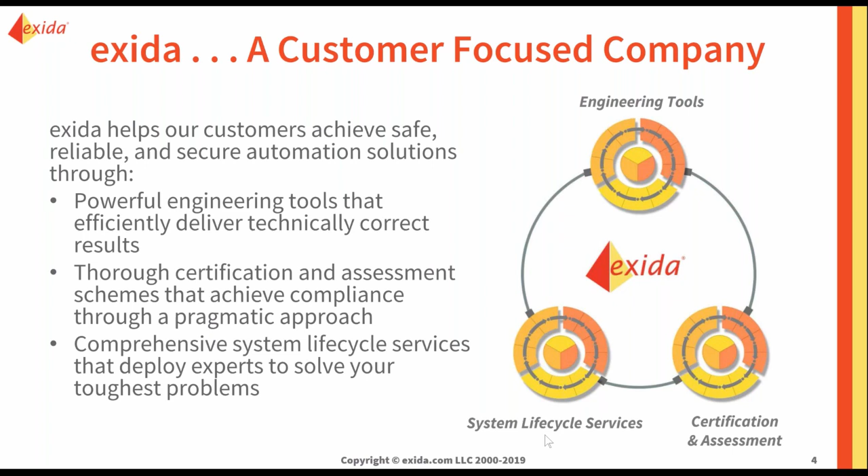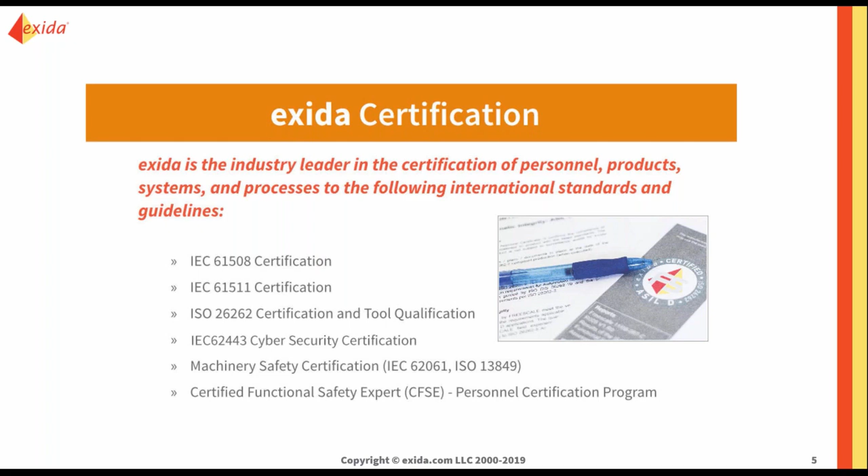Today, we're primarily going to be talking about the exida certification group, and the exida certification group does primarily functional safety and cybersecurity certification for personnel, for products, for systems, and even for engineering processes.

We started that particular business segment in about 2004, and we didn't realize it, but by 2014, we had become the global leader in functional safety certifications. We didn't realize it until ARC Advisory Group did a market study and showed we had about two-thirds of the entire functional safety certification market.

And even in the logic solver category, where the very first certifications were done in 1982 by TUV Product Service, which is now called TÜV SÜD, even in that category, exida has overcome a 20-year head start to become the market leader.

As you can see in the slide in the lower left-hand side, exida is the strong market leader, but we have strong competition from TÜV Rheinland, who's right behind us, and the other active companies doing functional safety certification are TÜV SÜD and TÜV Nord.

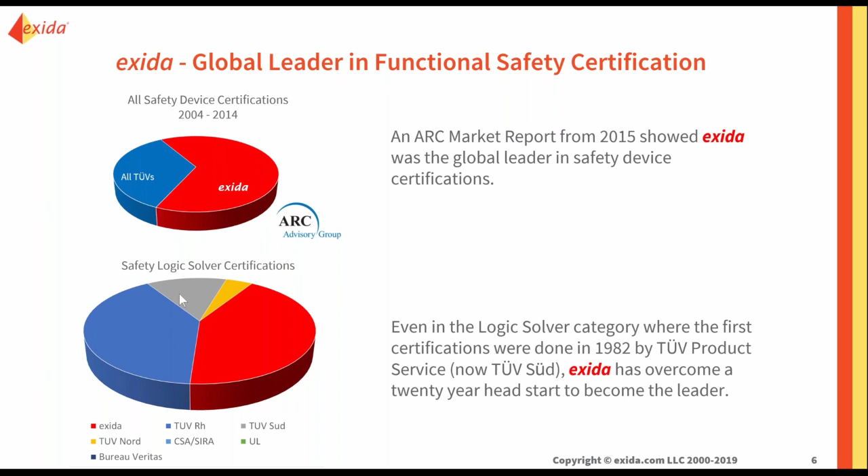exida pioneered automation cybersecurity and remains the clear world's leader in automation cybersecurity certification. We're very proud of our impact in these new areas.

Now, what is the SIL business all about? What is a SIL? In many industries and applications, automatic protection systems are designed to recognize dangerous conditions and take action to mitigate the danger.

This has been going on for decades and decades. Of course, when it came time to use complex electronics and software for this purpose, there was a lot of controversy. A large group of people met for many years and created a standard on exactly how the engineering should work for such important systems. And the engineering to create these systems is now done per a specialty field called functional safety. The basic safety standard defining this field is IEC 61508.

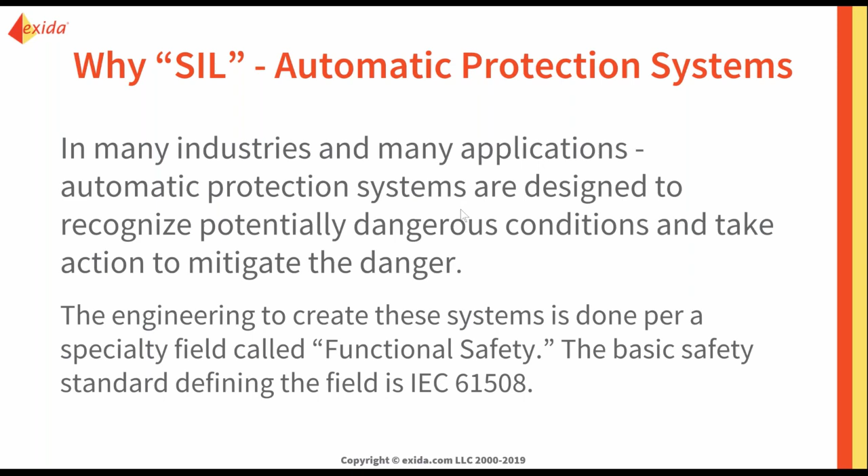Now, what is the SIL business? The 61508 standard has a definition for safety integrity level, and that standard defines four levels called SIL. You can see 1 is at the bottom. It's the least safe, and it has a risk characterized by a risk reduction factor between 10 and 100.

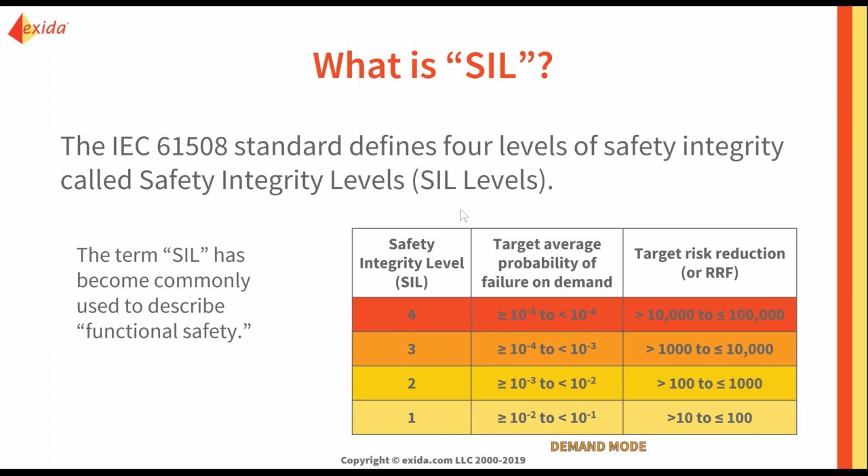Well, if we have this thing called SIL, and we know what it is and we know what the standard is, well, what is this thing called SIL certification? It's third-party expert attestation. I spotted that word in the standard for product certification programs. Thought it was kind of fancy, and I kind of like that word, attestation. Anyway, it means you get a really good expert to audit and attest that the subject of the certification meets the requirements of the standard.

What do they look at? Well, we do a detailed analysis of the engineering and test processes. Objective, determine the design quality and cybersecurity resilience.

We do a detailed analysis of the hardware design and the design margins, and that results in, if you have a good tool and a good method, a prediction of random failure rate in all failure modes. We do a detailed analysis of the software design, automatic diagnostics, and any response mechanisms designed into the product. And lastly, there's a detailed analysis and testing to show safe, correct operation of the product and to show sufficient cybersecurity susceptibility.

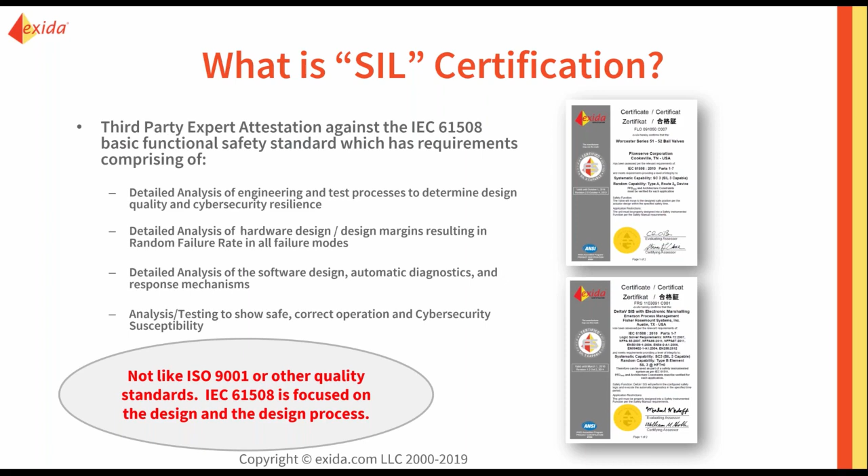As you might guess, or as you might see right away, this is not like your ISO 9001 quality standards, which originally concentrated on manufacturing procedures and manufacturing process quality. IEC 61508, on the other hand, is not focused much at all on manufacturing. It is focused on the design process, and therefore the quality of a design.

Who does SIL certification? Certification programs have been established by private companies and some governmental bodies around the world. But what's important is that any organization doing certification work should be accredited for their field of work.

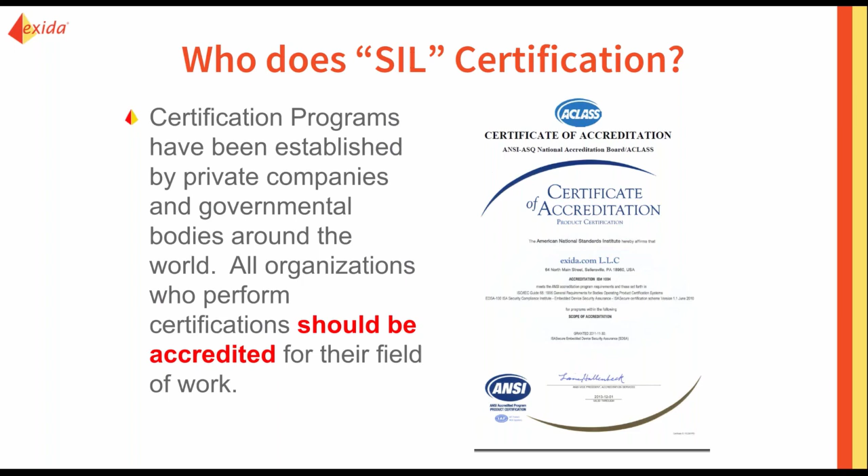In the United States, for example, exida was accredited by the American National Standards Institute, ANSI. ANSI is a member of the International Accreditation Forum, which means all the different accreditation bodies in the world compare notes and set up common criteria, and they have a multilateral recognition agreement which assures the global acceptance of any certificate that's part of this program. So this is a nice infrastructure that has been set up to accredit and validate certification bodies like exida.

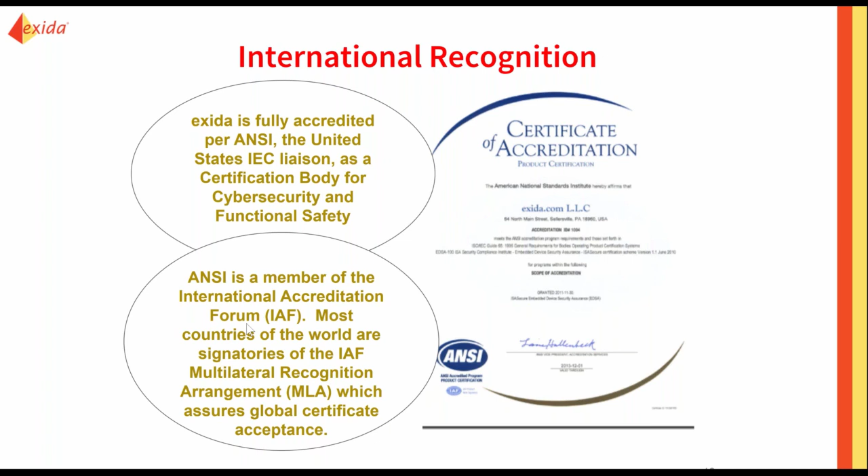Okay, we have this nice infrastructure. We're working to accredit per 61508, but what is 61508? IEC 61508 has two primary goals, and I hope these are pure common sense. Many of the requirements in the standard are directly aimed at making sure the product works correctly. We want it to be reliable. We want it to work and not fail.

Well, that's a good thing, but there's one more dimension to it, which is very important. We want to make sure the system will fail in a predictable, safe manner, which means the designers must consider the impact of failures and design for fail-safe response. Every requirement in IEC 61508 is intended to achieve these simple goals.

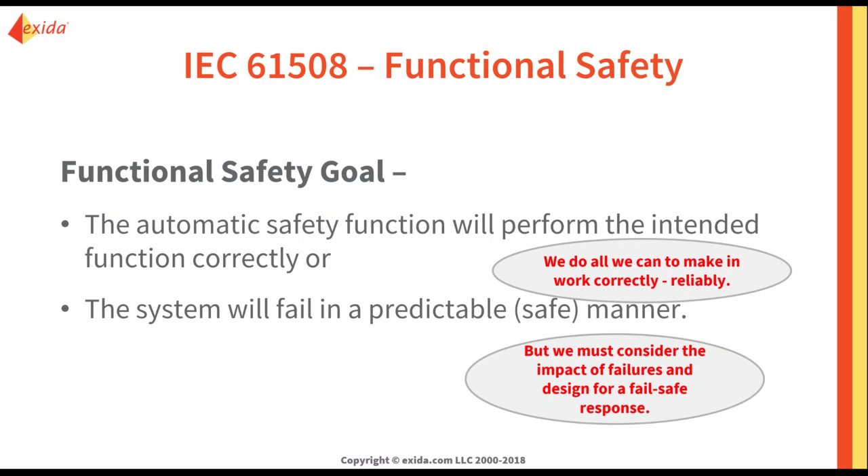Now, system designers have to look at three things when they're selecting the equipment they use, like your PLC, or your gas analyzer, or your motor controller. They have to look at a thing called systematic capability rating. They look at a thing called architecture constraints, and they look at a probability of dangerous failure calculation.

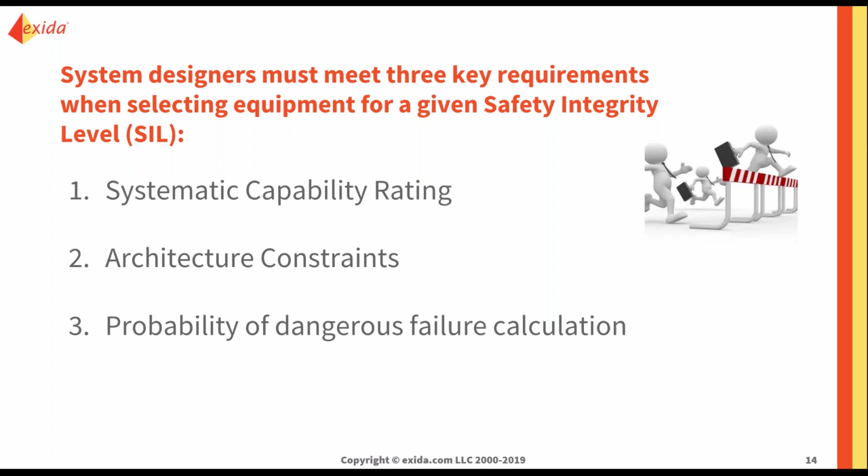What are these things? Well, systematic capability is a measure of design quality, justified by a PLC customer based on prior use experience and documented field history, field operation history, or alternatively IEC 61508 compliance.

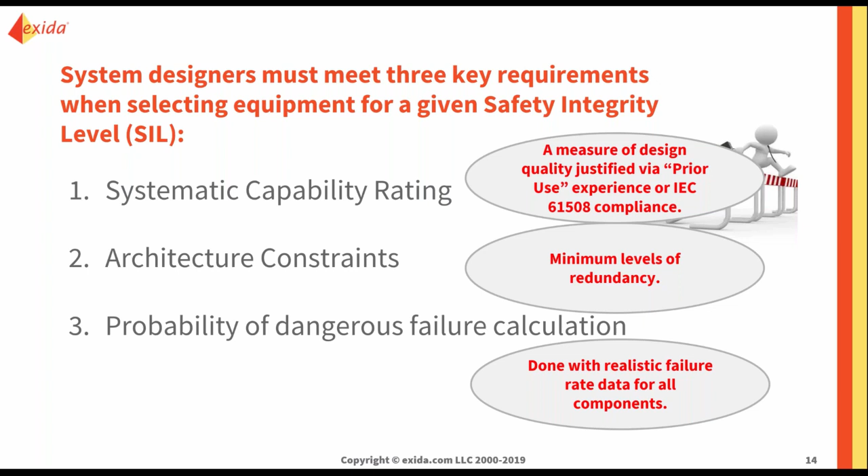Architecture constraints is just kind of a fancy word for sometimes there are minimum levels of redundancy. You're required to have a certain amount of redundancy in some designs. And lastly, this probability of dangerous failure calculation is interesting, but the key is it must be done with realistic failure rate data for all the components in a system design.

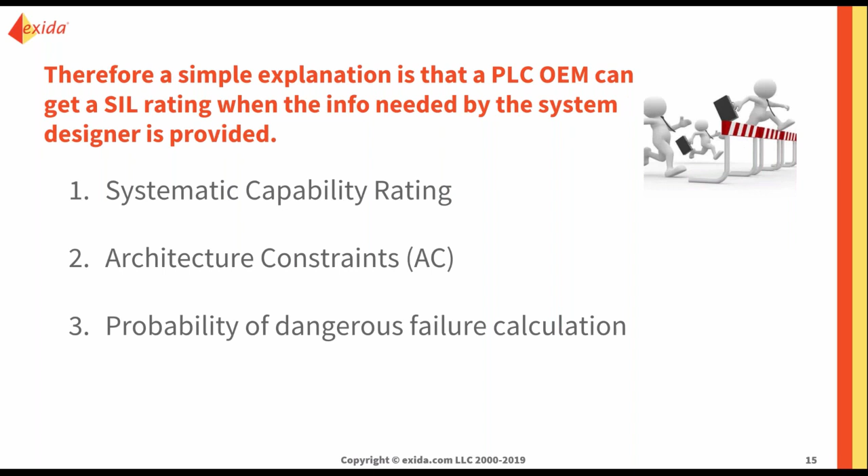Now, what does that mean then to an original equipment manufacturer trying to get a SIL rating? It means you must achieve a systematic capability rating done by detailed analysis of the engineering and test processes, which are done to determine design quality and cybersecurity strength.

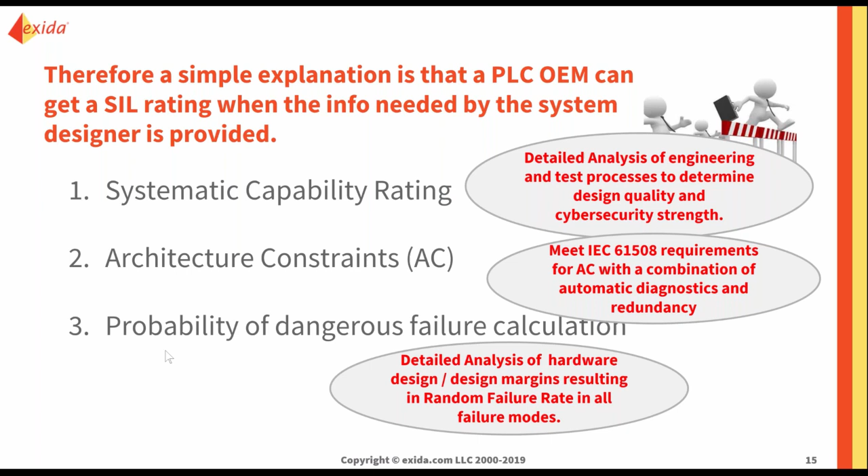It means you must meet certain requirements from 61508 for architecture constraints using a combination of automatic diagnostics and redundancy. And lastly, it means that the OEM must do a detailed analysis of the hardware, resulting in a failure rate prediction for all failure modes. You have to provide numbers that system designers can use when they're designing their system.

All right, what is this systematic capability? What do you have to do? Well, remember, we're trying to measure design quality. You have to have engineering process requirements that are based on good quality systems and good software engineering techniques. Those processes must be defined, documented, and audited. And the level of detail and the rigor increases with each SIL level. The process requirements for SIL 1 are not as strong as the process requirements for SIL 2, and so forth in SIL 3 and SIL 4.

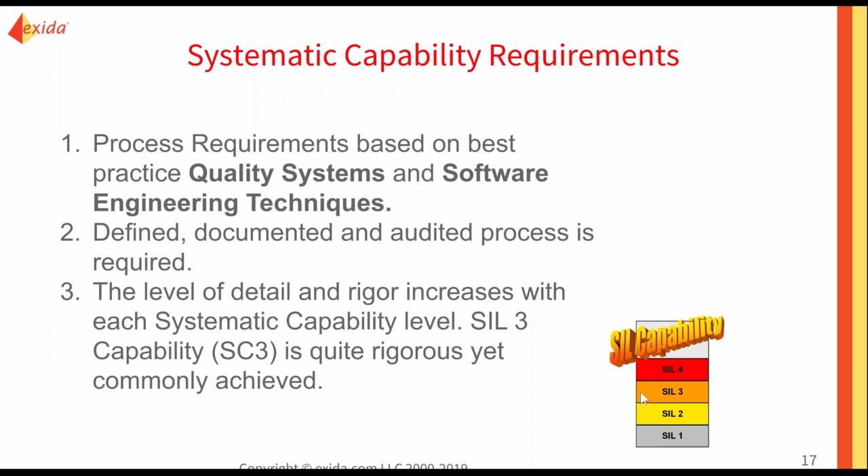Every process has to have a defined set of steps. For each step: what input documents and input information is required, what output documents are generated as a result of that work, what work is done in each step, and what error checking techniques are used to make sure the work in each step is done properly. And if you think about it, that makes sense. We're trying to make sure the product works correctly, and we don't want any residual design flaws.

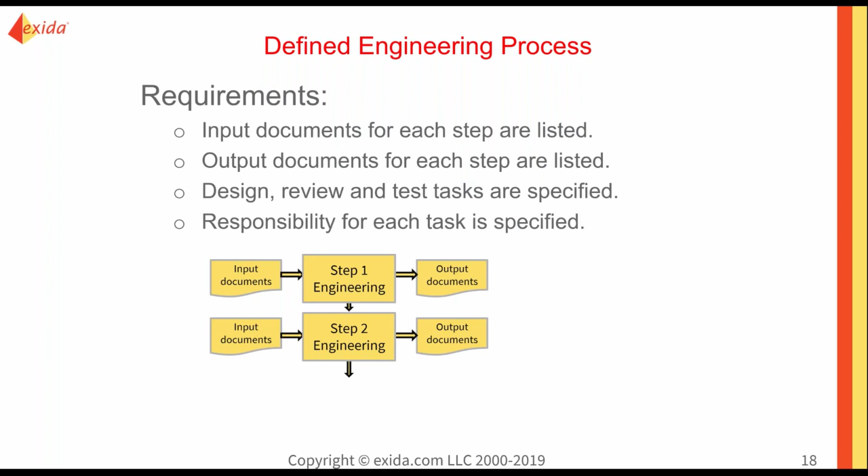A big part of the process is software engineering. Now, for those of you who have not heard about it, I remember reading about software engineering in the mid-1980s. It was a series of engineering techniques designed to increase software design quality and reduce design mistakes. Well, that sounds like 61508, which increases the probability that the automatic safety function will perform correctly. So software engineering is all about correct operation.

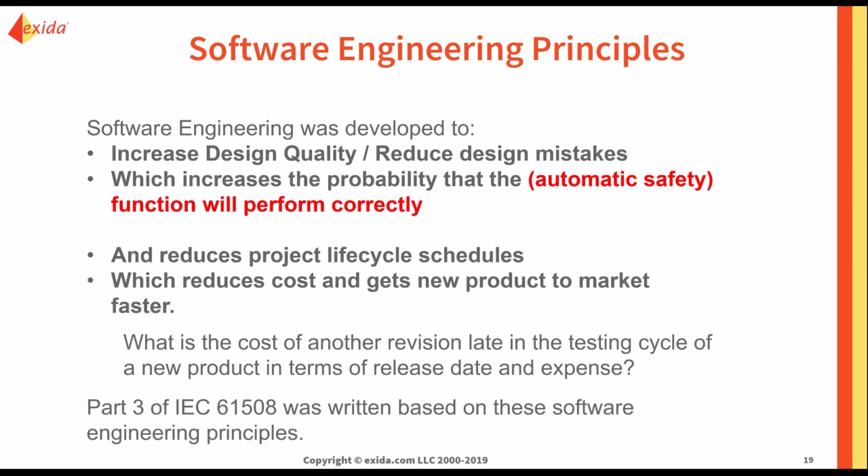Now, of course, software engineering should also reduce project lifecycle schedules because it reduces rework, and it should reduce product development cost and get new products to market faster. I remember reading a lot of studies about this in the 1980s, and it was quite interesting. The bottom line for this webinar is that Part 3 of IEC 61508 was written full of requirements based on fundamental software engineering principles.

But you got to have a good process. In other words, I like to say you got to have some playground rules. Now, I don't mean to insult software developers. I think of embedded software development work that I used to do, and I loved going to work. So I can almost think of my work as a playground.

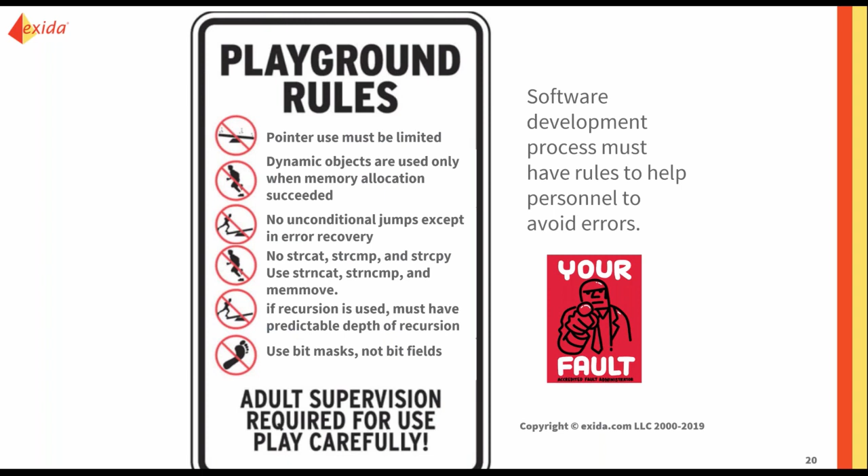Yeah, believe it or not. But you got to have rules in any playground. And the software development process must describe those rules and have enforcement mechanisms in place. Yeah, adult supervision is required.

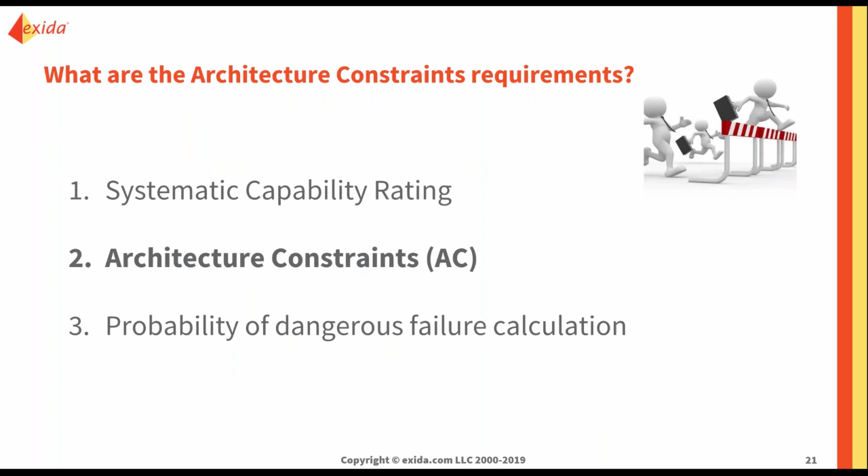Systematic capability, good engineering process, hardware and software. What about architecture constraints? That's where we have to meet 61508 requirements with a combination of automatic diagnostics and redundancy.

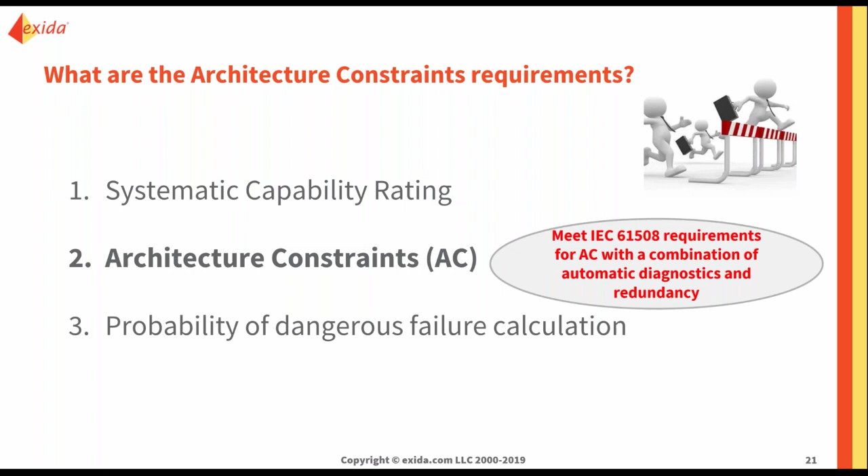I'll just briefly describe what this is all about. The 2010 version of 61508 had two alternative mechanisms to meet architecture constraints: Route 1H, which uses the upper chart, and Route 2H, which uses a set of rules characterized by the lower chart.

And you can see the lower chart's a bit simpler, and Route 2H can be used if you have a good traceable field failure rate based mechanism for your failure rate predictions. And if you don't, then you have to use 1H, which is still calculated from the failure rate predictions. But the bottom line is Route 1H doesn't have as much

depth and precision required on the failure rate prediction mechanism. But both of these methods, 1H and 2H, depend very much on failure rate predictions. And the bottom line is redundant hardware may be required for the higher SIL levels.

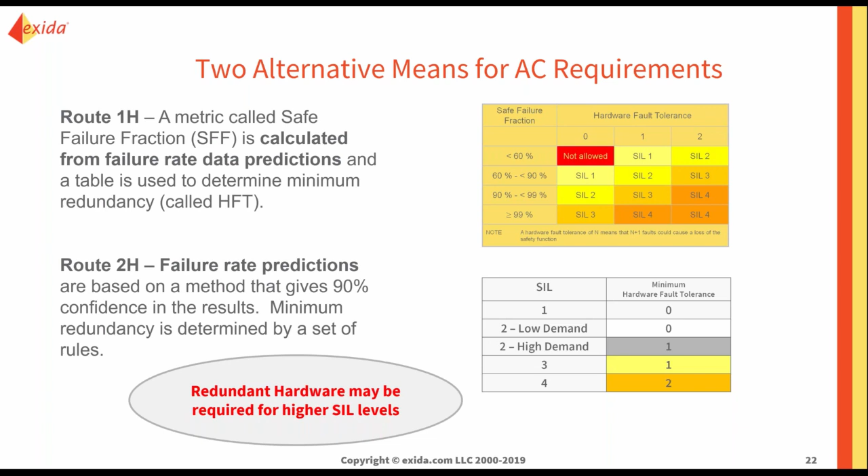Systematic capability is your engineering process. Architecture constraints is automatic diagnostics in combination with redundancy.

The last thing is we want to talk again about the importance of this failure rate prediction, because what we're trying to do is do a detailed analysis of the hardware and the design margins, resulting in a random failure rate prediction for every valid failure mode of a product.

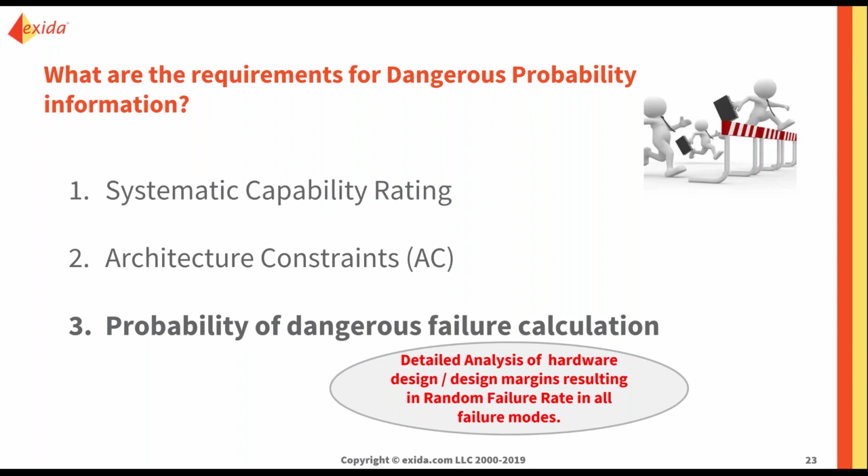Now at exida, we use the FMEDA methodology to accomplish this. And FMEDA stands for Failure Mode Effect and Diagnostic Analysis. It's a method that was created in the late 1980s by engineers that are now at exida. And it is a study of design strength. Better, stronger designs have lower failure rates.

Also, you must consider the components and their application parameters. The FMEDA technique requires a component failure rate database with failure rates and failure mode distributions for all of the components, typically done as a function of application and environmental profile. So the component database has a lot of data in it.

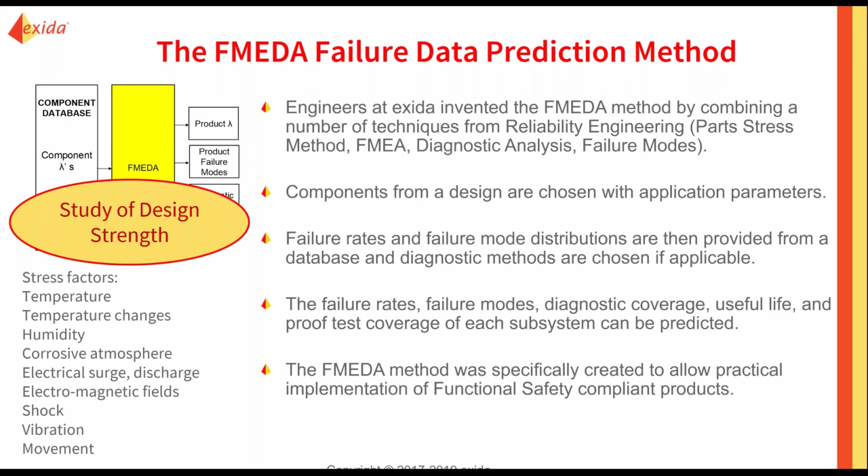If you have a good component database, you can use the FMEDA technique to predict failure rates, failure modes, diagnostic coverage, which is a measure of diagnostic quality, useful life, and even proof test effectiveness for each subsystem. The whole FMEDA method was specifically created to allow practical implementation of functional safety compliant products.

At exida, we have a specific tool developed for doing FMEDAs called FMEDAx. It has all the features we need to pretty cost effectively meet all the functional safety standards. And we do make that tool available to our own analysts and our competitors. And some of our competitors are using the exida tool.

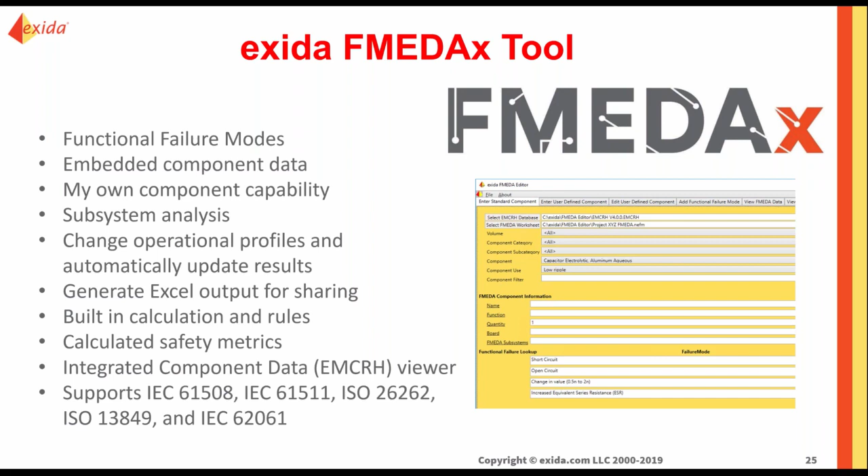But the tool's got to have that good failure database that I talked about. Early on, there was a lot of debate about what to use. And what's important is you use a database that produces realistic predictions for the particular application.

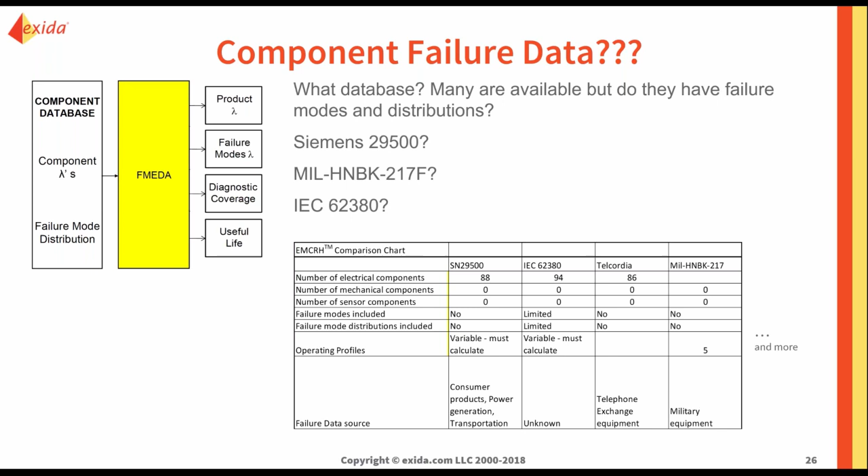To make sure that happens, at exida, we use what I call a closed loop technique, where we gather up field failure data from manufacturer's data, from exida's SILStat failure rate collection software, ISPM, another failure rate data collection software, OREDA, the Offshore Reliability Equipment Database Association, and we compare the OREDA published data with field failure data from other sources, and we compare the total failure rate for a product to the FMEDA result.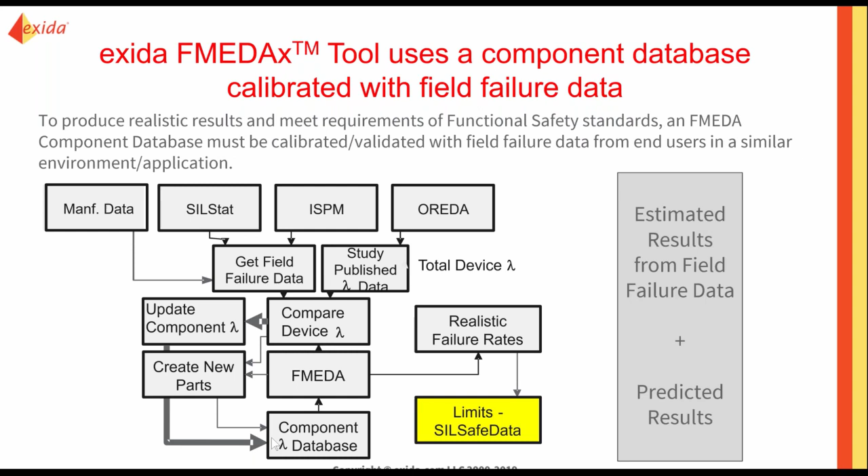It works pretty good. Of course, it's a lot of work and it takes a lot of time, but it's the only way we could think of to do it.

The FMEDA-X tool does have electronic components, mechanical components, and sensor components, with many new technology components using the latest semiconductor technology. We're able to work pretty closely with several semiconductor companies to keep our database way up to date. And at this point, this database has been validated with over 350 billion unit operating hours of equipment data from multiple applications and multiple environments, which is pretty nice.

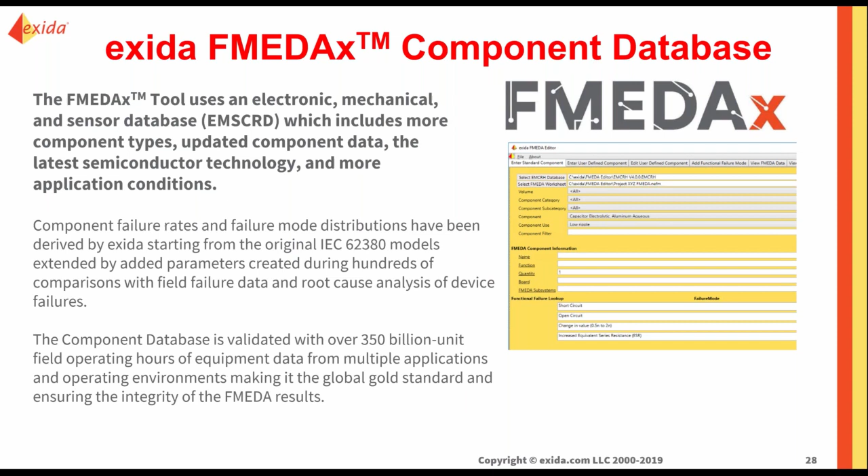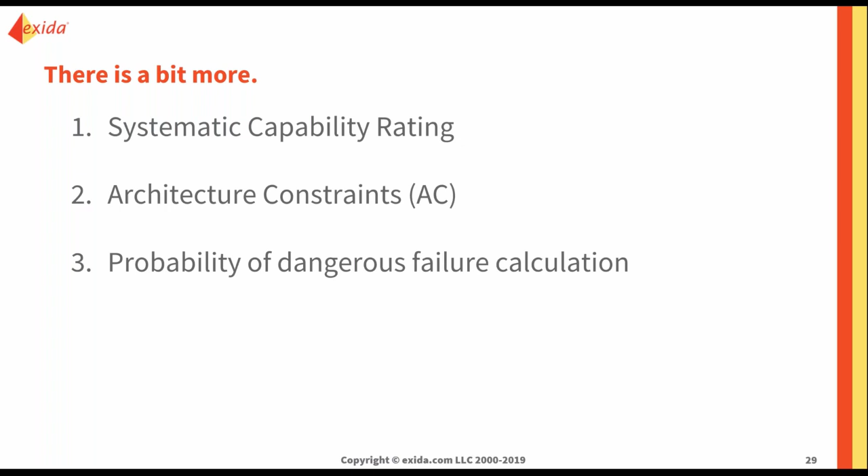Now, we talked about systematic capability, architecture constraints, and probability of dangerous failure calculation. And those three categories tell you a whole lot about 61508. We do detailed analysis of engineering and test processes. We do a detailed analysis of hardware in order to determine failure rates, which are used to meet architecture constraints. And then, of course, we provide the failure rate data for system designers to do probability of dangerous failure calculation.

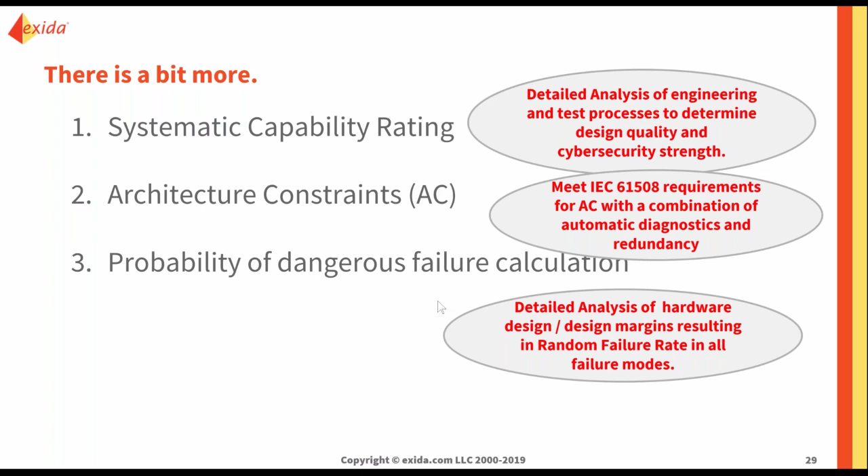And I kind of misled you because there is a little bit more to it. There is a need for an audit of quality procedures. There needs to be manufacturing audit, unless that's done by someone else, another company, which may be the case. And of course, the objective there is to make sure that a given design can be replicated safely. And lastly, there's a product documentation audit.

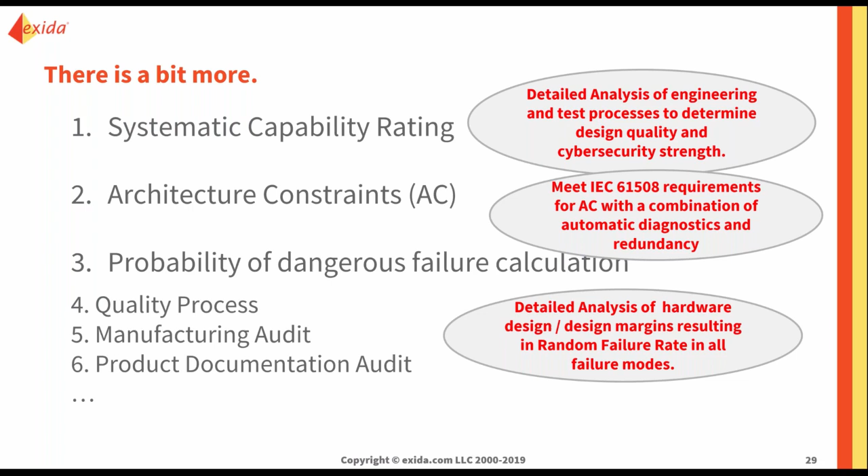Exida uses a concept called the safety case, where we have documents listing every single requirement from 61508 and any other referenced standards.

So we go through for every single requirement and make a judgment as to whether the company and the product meet each requirement. You write down an argument as to how you meet that requirement, and for every argument you must have evidence showing that the argument is valid. Requirement, argument, evidence.

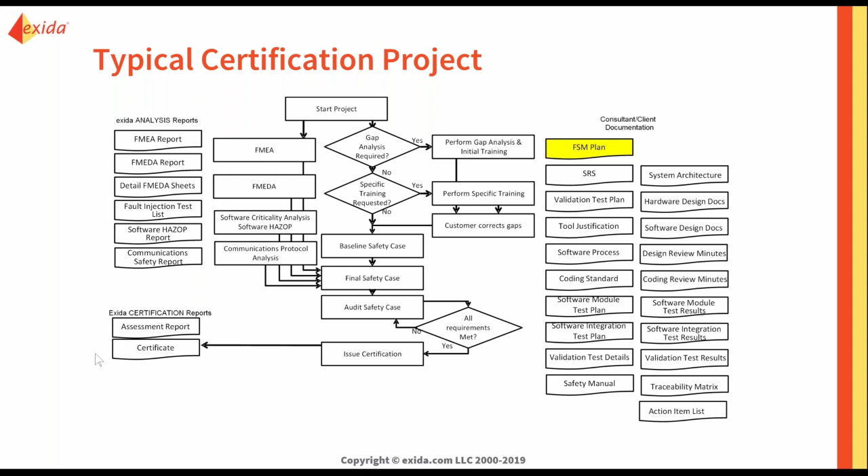Now, you saw this certification project, and you saw that it might have looked tough. It's okay. I want you to know that many have been successful. Hundreds of automation manufacturers have successfully achieved IEC 61508 certification using the exida process, which we think is tougher than anyone else - well, we know it's tougher than everyone else. And yet, people still pass. Here's two examples that have achieved a SIL 3 systematic capability, which means they have a pretty good process in place. Nothing's perfect, but it's really good. So it can be done. You can do it.

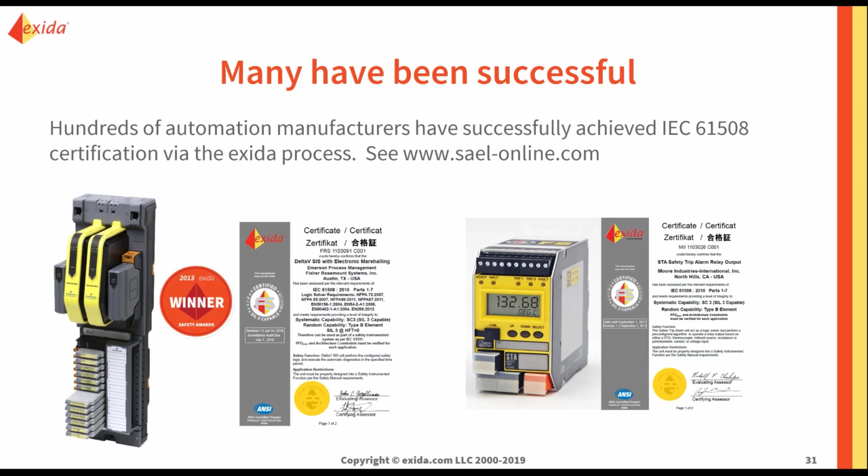Let me be positive with you. You might ask yourself, why are you really interested, and is it worth the trouble? Well, we have to ask the question, why does anyone even care about SIL? In the process industries, the 61508 derivative standard, IEC 61511, specifies 61508 certification as one of the ways to justify equipment selection.

And it's really simple and really easy. Therefore, what we see happening is anyone who is interested in saving engineering hours and getting their equipment justified rapidly will be using 61508 certified devices. Another way of saying it is that many of the designers want to dump the problem on the vendor. And of course, that's been going on for decades as well.

Many operating companies want to reduce spare parts types, and they use certified components for everything in the control system - the automatic protection and the control. Many petrochemical companies are now using 61508 certification as a measure of product design quality, which I believe it is.

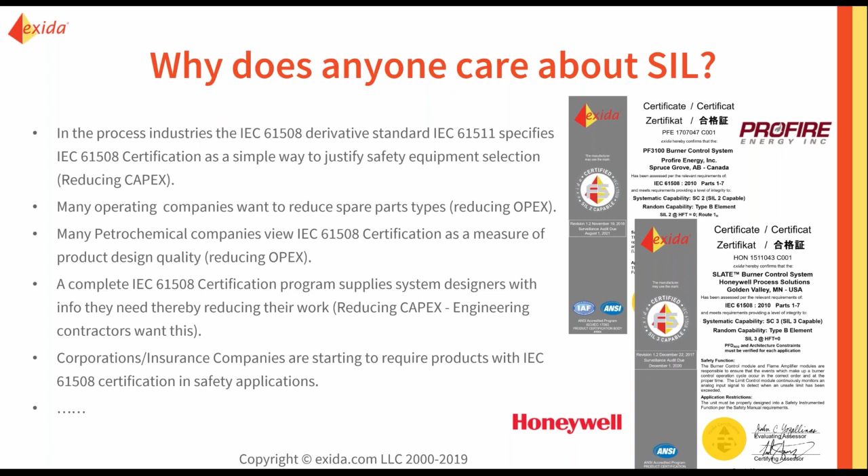The bottom line is you can do it. Many of the world's leading safety PLC manufacturers have successfully passed the exida certification program. At this point, we're very proud that the exida certificate has become the most requested certification in the process industry safety function market. So if you're going to do this, give us a call. So when your customer asks, do you have an exida certificate? You can say, yes, sir.